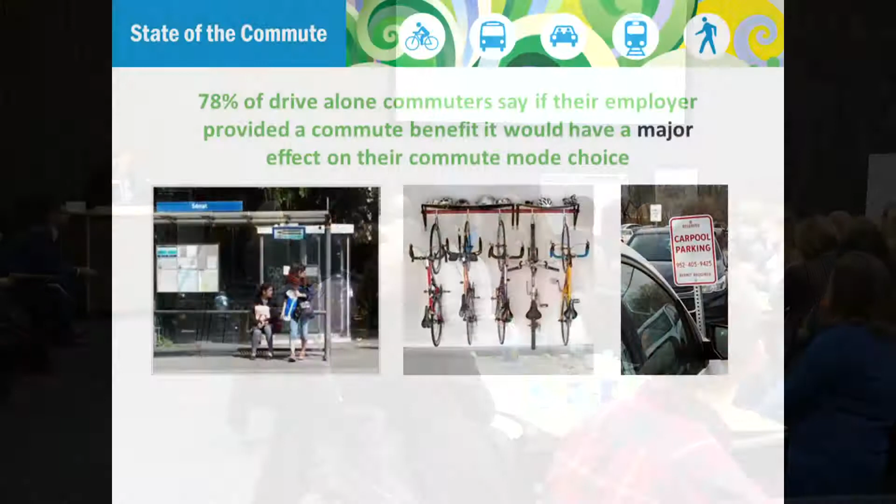When employers provide commuter programs such as transit benefit, telework, van pools, preferential parking programs, 1 in 5 employees kick their solo commuting habit. And that's really a 20% shift. So that's a big change, and that really makes a difference. And that happens a lot on 494.

When is it the most effective time to change someone's commute? Really, when there's another change happening. So when they're starting a new job, when they move to a new location, or when something disrupts their daily routine. And that happens a lot in this corridor. And we're going to learn a little bit more about some of those disruptions to our daily routine and our commute from the MnDOT folks. But it's all positive. It's good things.

So I'd like to read a little introduction. We have three of our very great, helpful MnDOT employees here today. And Aaron Tagg, who's going to be presenting first, he's a professional engineer. He's worked for MnDOT for 17 years, and he started as a student worker when he was a civil engineering student at the University of Minnesota. He is currently a West Area Engineer in MnDOT's Metro District. As West Area Engineer, he helps to manage MnDOT's program in Hennepin County. Prior to serving as West Area Engineer, he worked in MnDOT's Metro District Transit section, working in right-of-way design and construction on North Star Commuter Rail, Green Line LRT, and Green Line Extension LRT.

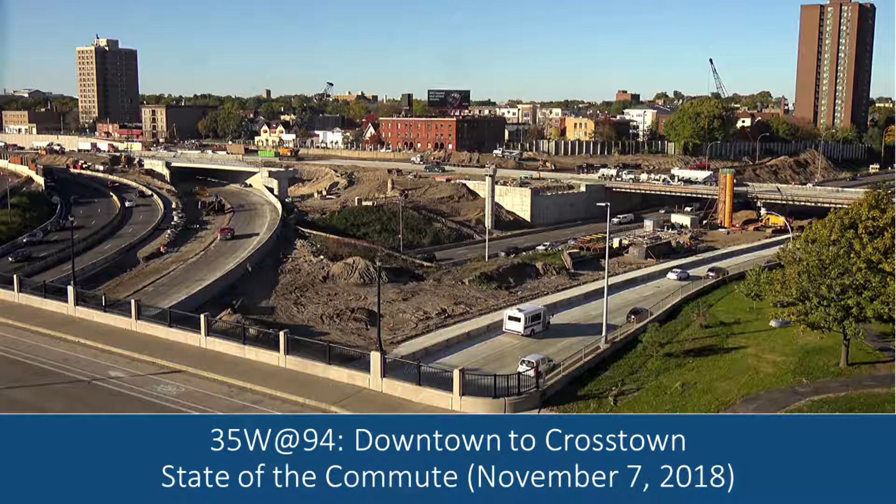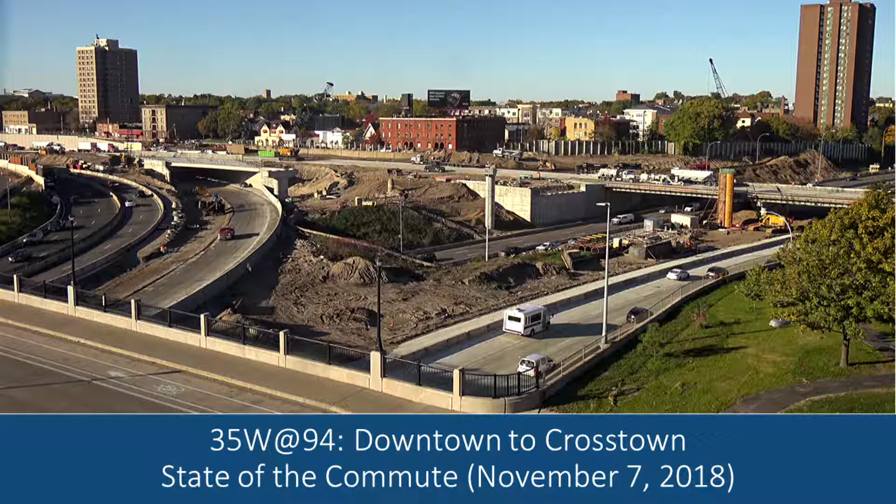But as background, the 35W 94 project is a big project we have going on right now. It started last summer, fall, and it goes through the summer of 2021. It's a project that came together after many decades of work. Four big partners are part of the project: Metro Transit, the City of Minneapolis, Hennepin County, and MnDOT. So I'm here today really to talk about where we are with the project and update people on the construction.

So on October 22nd, we had a big milestone. We moved into phase 3 of the project. Phase 2, which we were in this summer for about 4 months, was the most impactful part of the project. A big piece of that was we had the access into and out of downtown Minneapolis completely closed. So moving into stage 3 on October 22nd, we reopened that, as well as made some traffic shifts. You can see on this map we're about a third of the way through the entire project. So we're moving along, we're on schedule and on budget.

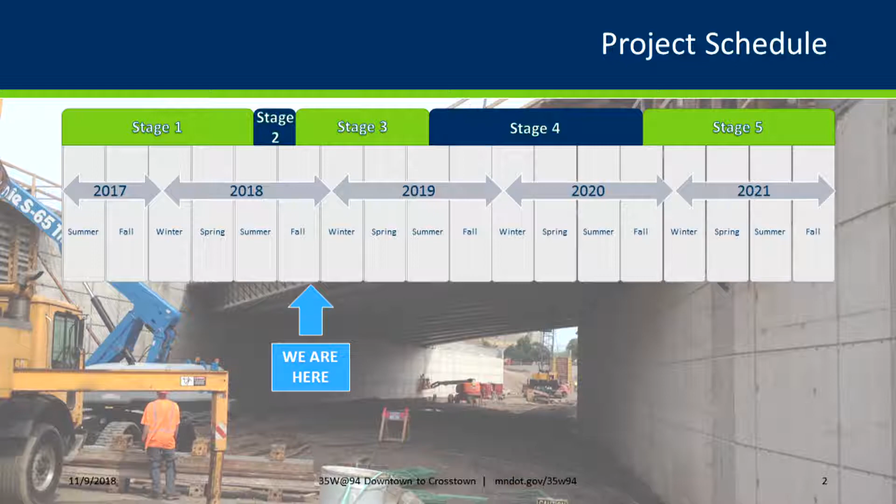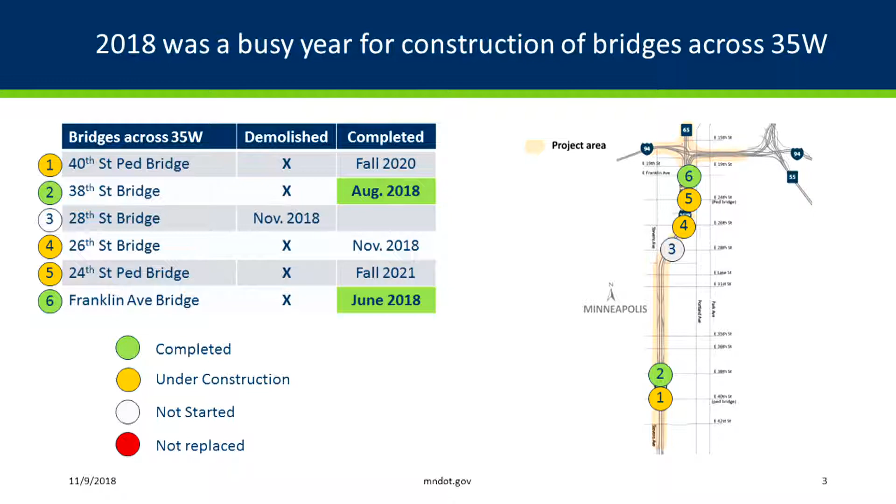So what we got done this year. It's a good time, moving into stage 3, to reflect on everything that was done. From a bridge standpoint, this year was really about getting bridges out of the way. There were a number of bridges that crossed 35W, and we got a number of them completed and a bunch out of the way. Tomorrow, I think at 5 or 6 a.m., the 26th Street Bridge that's been under construction for the last number of months will reopen, followed immediately by closing the 28th Street Bridge, which will coincide with a weekend closure this weekend so we can demolish that bridge. That 28th Street Bridge is the last bridge over 35W that has to be demoed as part of this project.

We also had a number of structural work around downtown Minneapolis. I'll talk about the tunnel bridge a number of times; you'll see it in the presentation to understand why we call it tunnel bridge. But we got a number of structures done in a very short amount of time this summer in the 35W 94 area.

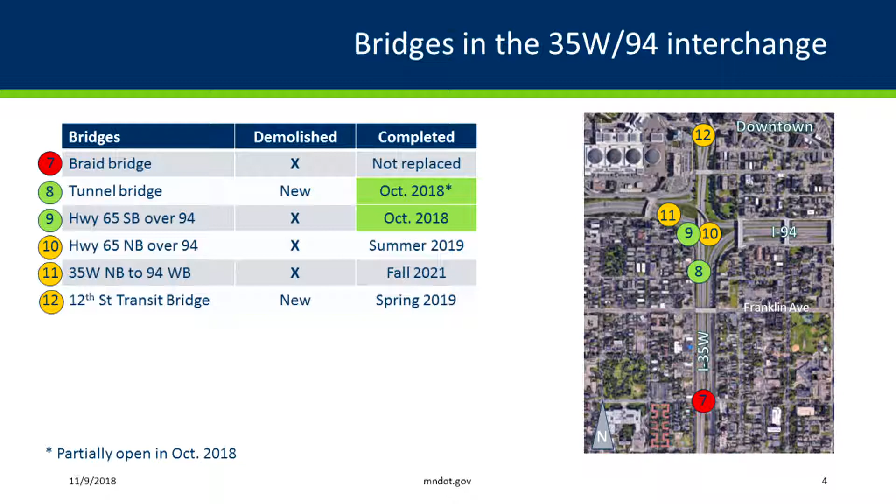And then we continue to work on bridges in the Lake Street area. Right now we're really working on the southbound side of the freeway. If you drive that corridor, you'll see probably close to a dozen cranes in this area. There's a lot of work going on here, and that work will continue through the winter. So we'll keep working on the structures and retaining walls throughout the winter to get a lot of those bridges done for moving into stage 4 next year.

Weekend closures. I noted we have one coming up this weekend, and tentatively another one next weekend. We've had a lot of closures this year. A lot of that was related to bridge demolition and getting those bridges out of the way, as well as some pretty major utility crossings that we dug across the interstate over a weekend, put in some very large utilities, repaved and got them back open. But as you can see from this chart, the majority of the weekend closures are behind us now. Moving forward, we're going to see a lot fewer, maybe one or so a year.

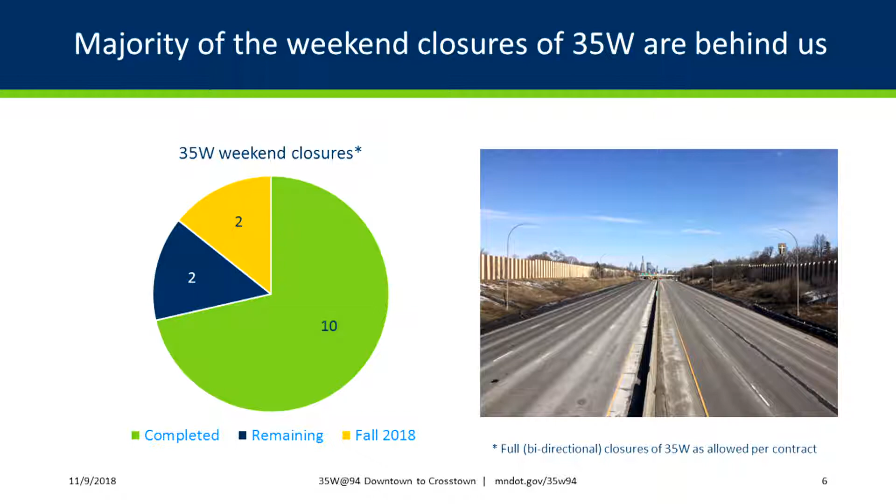So what did we get when we moved into Stage 3? First off, we opened access out of downtown Minneapolis on what we call Highway 65. That is transit only, so it gave them a big advantage. Charles will talk about this maybe later, but Metro Transit and MVTA have seen a big savings in being able to move back to that entrance out of downtown Minneapolis. We also opened one lane into downtown Minneapolis for general purpose traffic. So anyone can now get from 35W directly into downtown Minneapolis via that direct connection.

We closed the 31st Street entrance ramp. Previously that had been open to buses and violators. Now it is closed to everyone. The buses can't use it, and if violators try now, they'll end up in a big pile of dirt. So that's closed now. I really encourage anyone driving downtown to follow the signs we have. We have two big do not enter signs on either side of the ramp.

That means please don't go that way unless you are a bus and it says you can do that. There's a number of reasons for that. Some of it's safety, some of it's how the traffic interacts when it merges onto the freeway. Professional bus drivers coming, 1 minute or so, can merge into traffic a lot easier and safer than general traffic can.

We moved the alignment of southbound 35W to what is essentially going to be the permanent alignment. So we did a lot of permanent paving in the October timeframe, and you'll see that a little bit later. And we opened the northbound 35W ramp to 31st Street Monday. So that was good news for people trying to get into South Minneapolis.

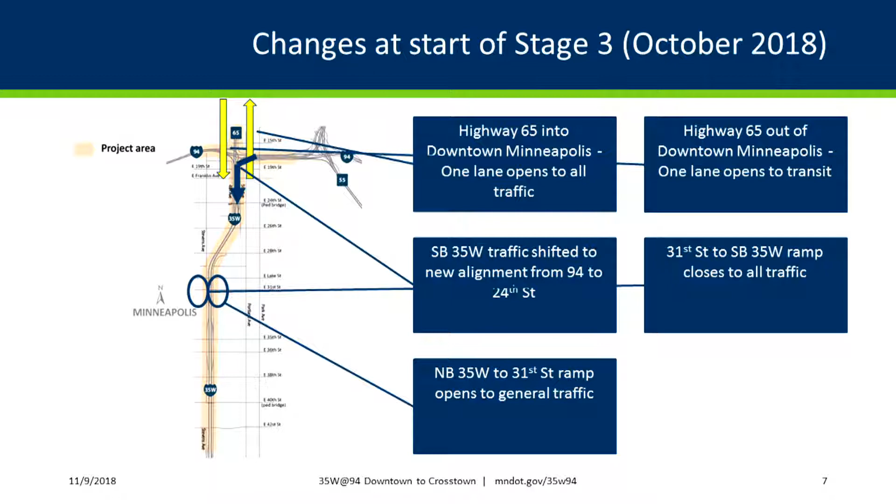And so what are we going to work on during Stage 3? Continue to work on some of the bridges near downtown Minneapolis. Continue to work on that southbound side of the freeway, kind of between where the new pavement ends today down to the 31st Street area. Keep working on bridges, get a number of those done.

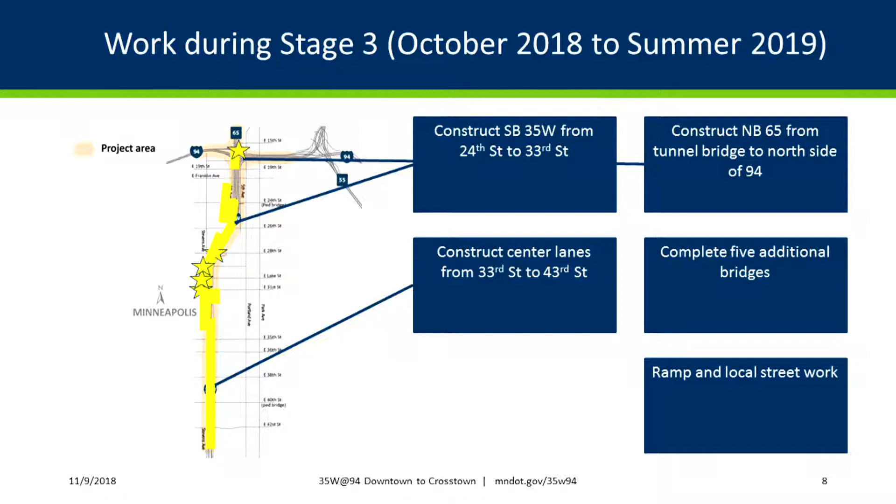In the south part of the project, right now we're really working on the center of the freeway, so we'll get the permanent pavement and median barrier in for the center of the freeway. And then there will continue to be a lot of work kind of on the outside of the freeway area, on the side streets and intersections, retaining walls, utilities.

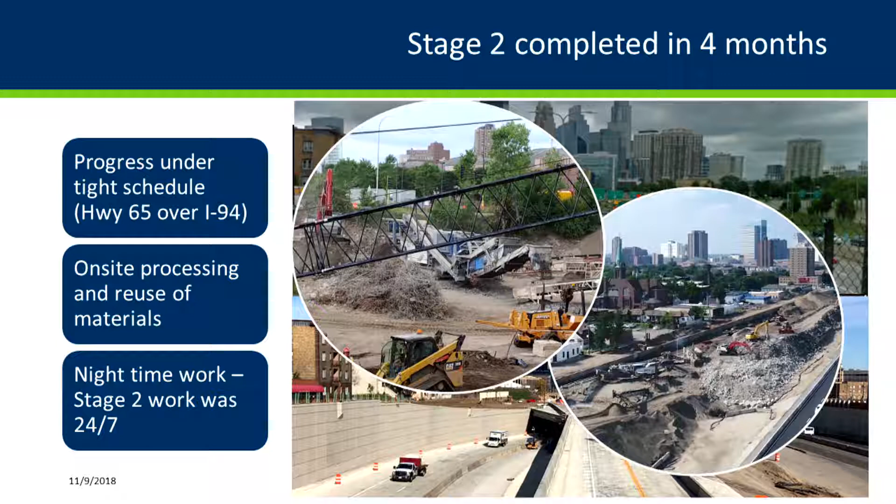As you've traveled the corridor, you've probably seen the huge piles of concrete that turned into huge piles of crushed up material. Not only is it great that we're able to recycle all this material, but we're reusing this material as base for the highway, so it saves a lot of trucking. So there's thousands of trucks that we're taking off of the regional freeway system, off of local roads, by being able to crush this concrete on site and then reuse it right on site. Otherwise, we would have to haul all that off and then haul in new material to place for the pavement.

They're paving the southbound 35W lanes over here, a big job, and they're paving the new deck for the southbound Highway 65 bridge into downtown Minneapolis. So just about every night, they moved it around. They were trying to kind of spread the impacts. This is something that really helped with traffic and transit to get those services into downtown Minneapolis reestablished, but it did have an effect on the neighbors who live around here, and we're trying to minimize that by moving crews around and stuff like that.

All right, so now we have some drone footage of what it looks like today. So this is looking south, so downtown is right behind us, 94 is right here. This is all new pavement that was completed during stage 2 of the work. New bridge over 94, the new Highway 65 bridge up here. This is what we refer to as the tunnel bridge.

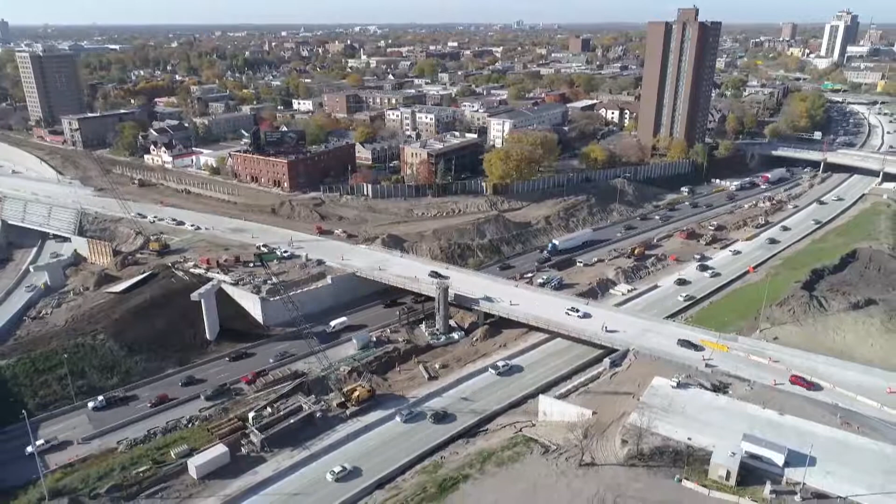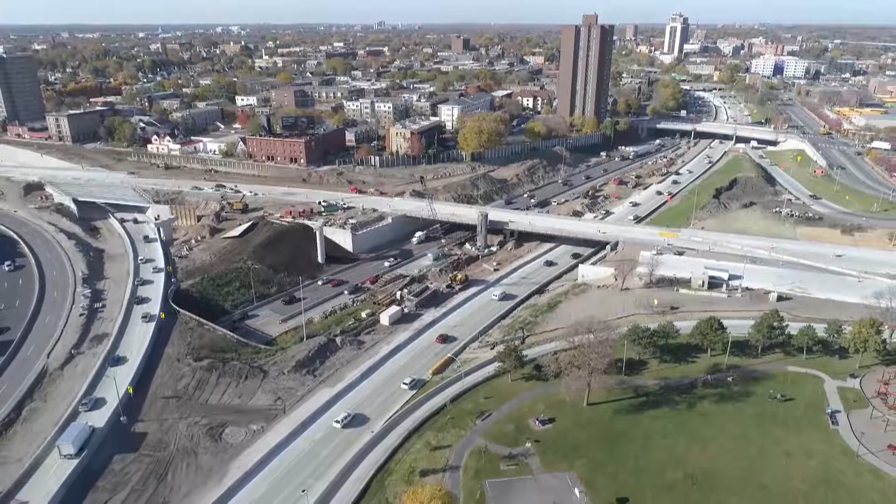So this is a new configuration where southbound 35W comes under Highway 65 through the big curve. Before, southbound 35 kind of was on the left side of the corridor, and then around 24th Street we had the Braid Bridge, so it came up and over and came in actually on the right side of the freeway. So this changes that configuration. You can see the piers here starting to appear for the new northbound 35 to westbound 94 bridge.

This is looking kind of northwest, so 94 is over here. Here's southbound 35. Again, you can see the tunnel bridge here. This is the reestablished 65 into downtown Minneapolis. It's just one lane for general traffic right now, and then one transit-only lane out here.

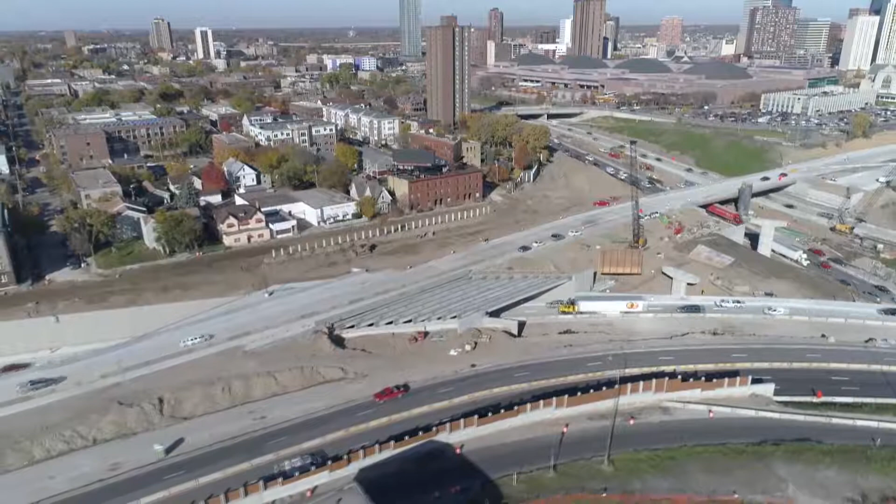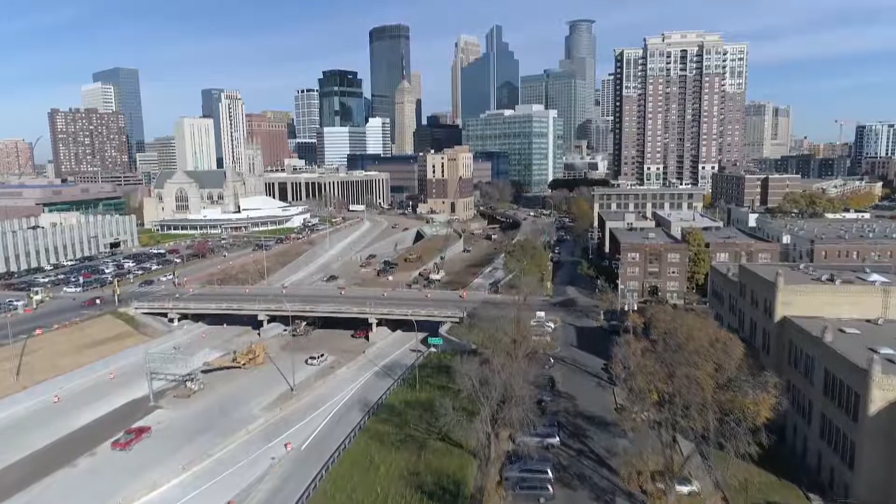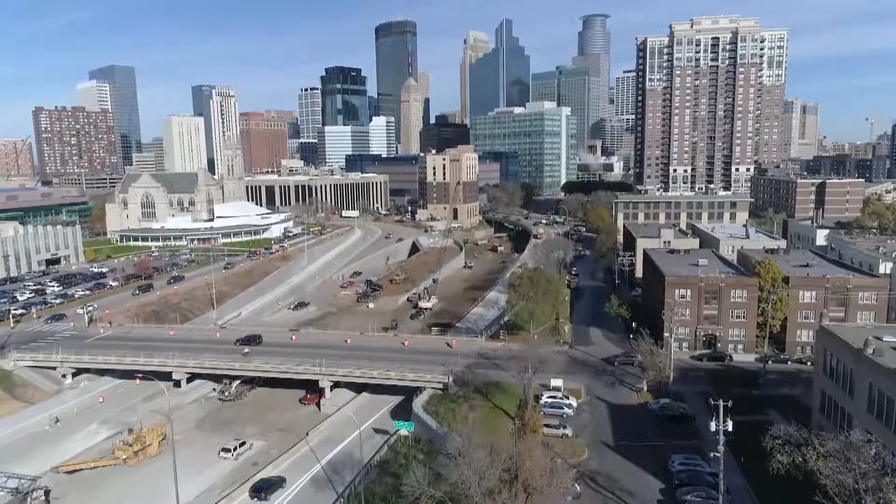Down here, this is where southbound 35W had been during stage 2 of the project. And then this is kind of flying on Highway 65 into downtown Minneapolis at the 15th Street Bridge. Looking here, this is going to be the new transit access into and out of downtown Minneapolis on 12th Street. So we've reestablished people being able to get into here.

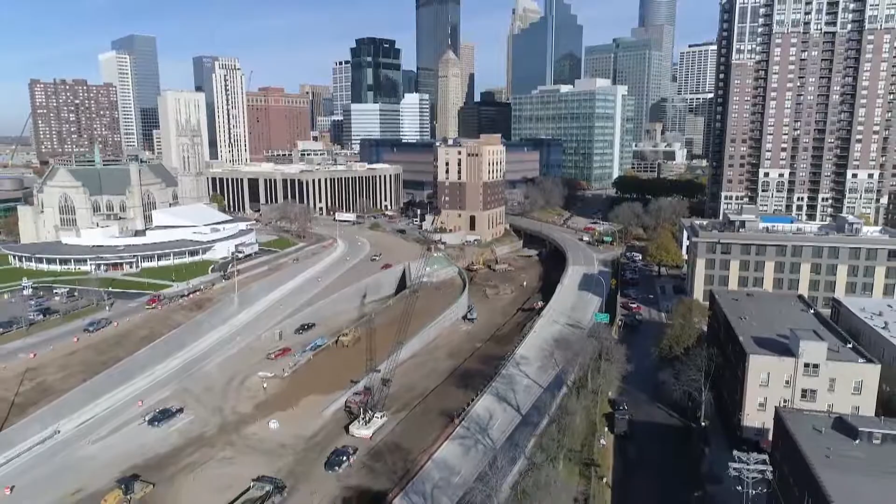They paved Fifth Avenue since this was done, so they're working on trying to maybe get that open this fall. Still, it's not supposed to open until next year, but they're working on that. And then this is the off-ramp of 12th Street for the buses only.

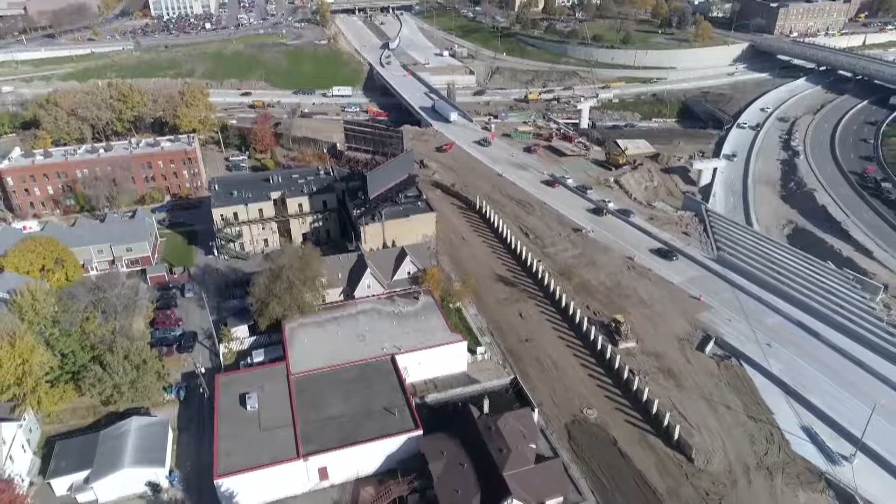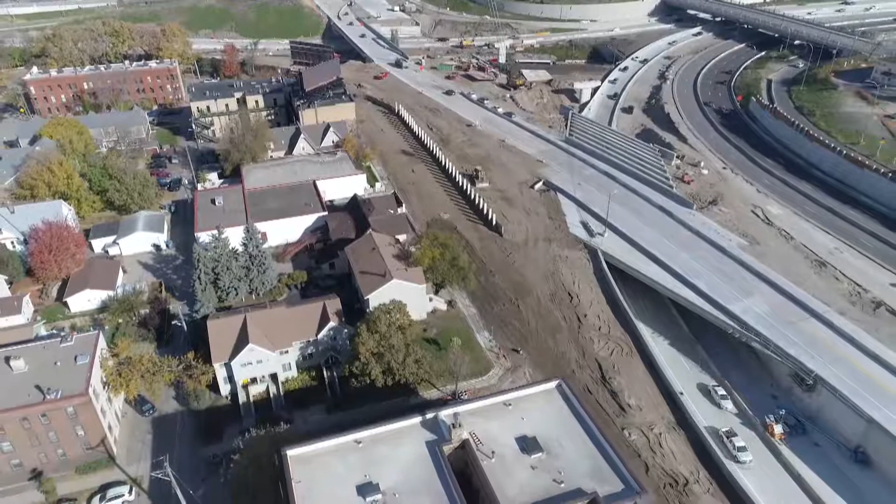And then another view looking north, so there's 94, 35 going around the side over here, and that's Highway 65. You can see the disruption to a lot of the residences along here. The street was in front of their residences, and it was torn up for much of stage 2, but that's getting back in place and will be paved before the winter.

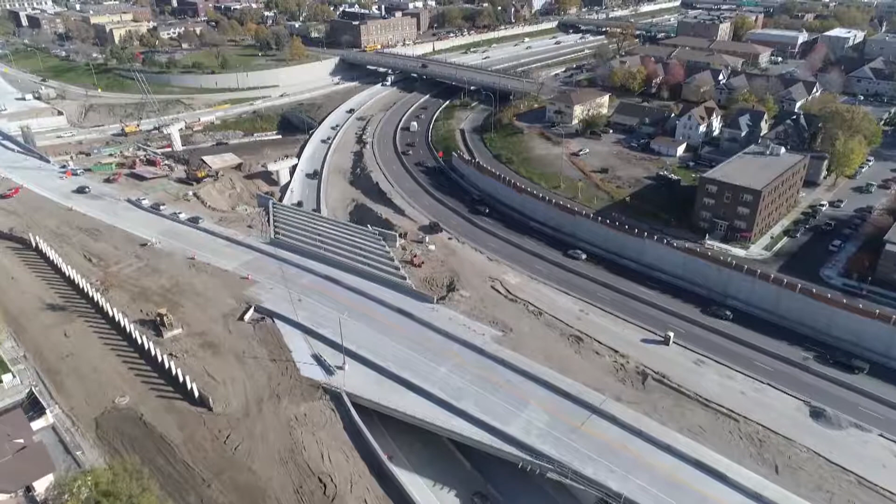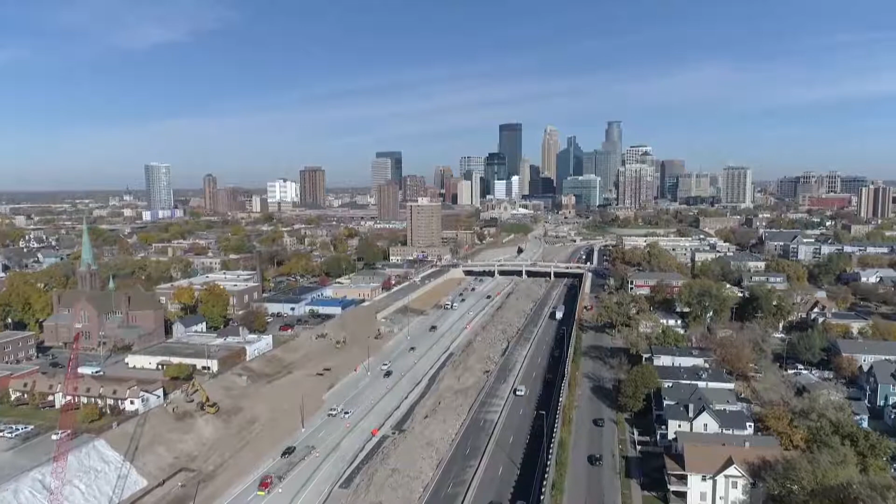This is from about 24th Street looking north. You can see the retaining walls starting to come in on the west side of the freeway. You can see where they've been completed over here. The new Franklin Avenue Bridge opened in the June time frame. This is all new pavement in this area, and the northbound traffic is over on the right side of the freeway headed northbound.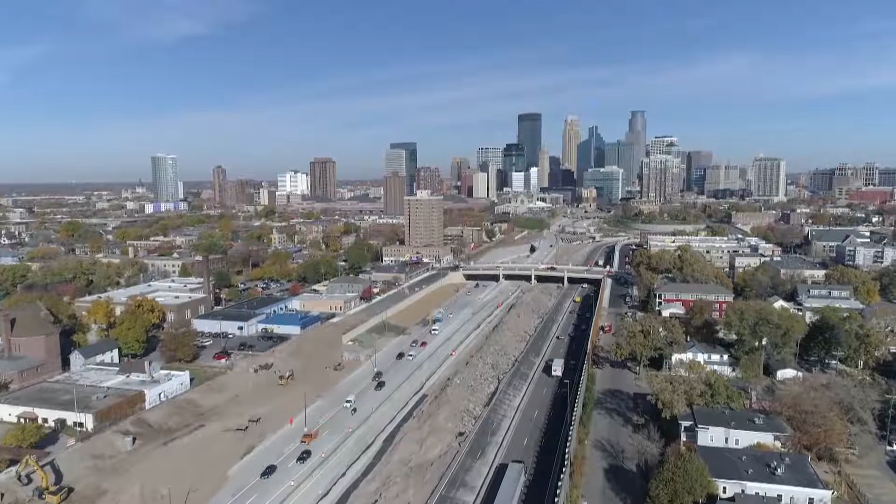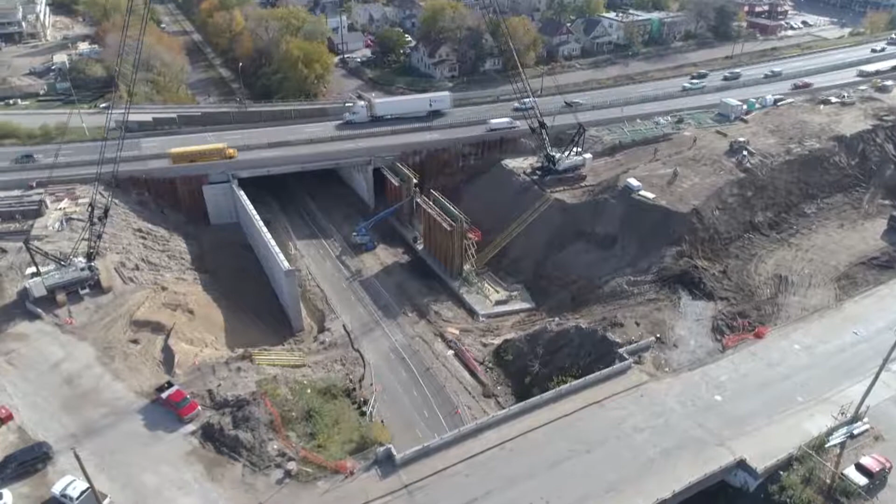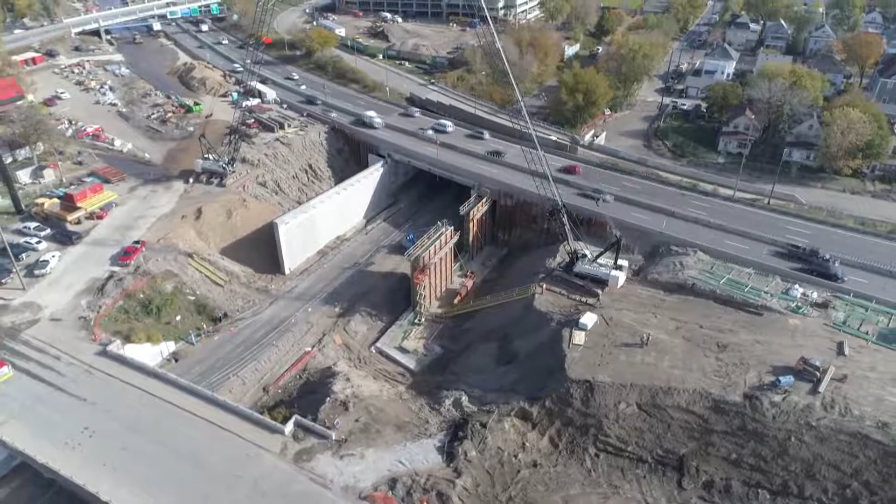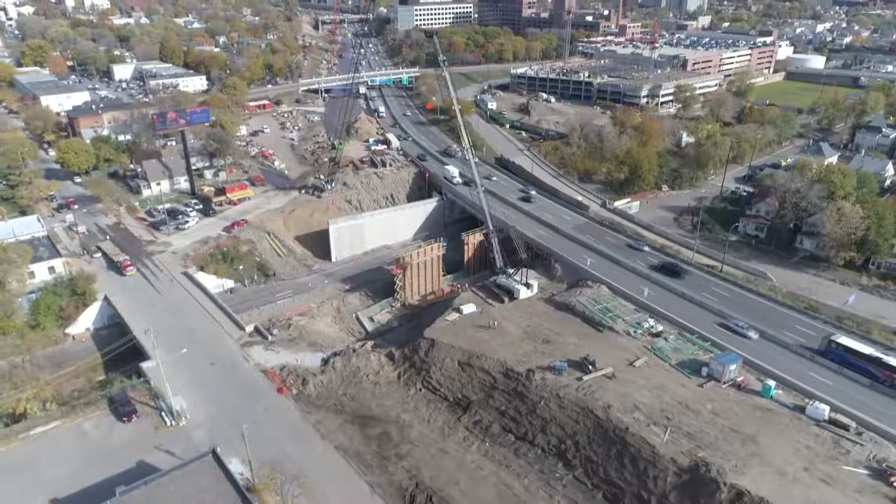This is the Lake Street area. So they've started work on the southbound bridges around Lake Street. And one thing I want to point out here, and I don't want to steal Charles's thunder for later talking about the Orange Line, but I just want to note that you can see how little space there is underneath 35W with the existing Lake Street bridges. With the new bridge and the new transit station, these are the two abutments, so there's that much room underneath 35W. So from a perception standpoint, as you are a pedestrian or transit user going through that area, it will feel much, much better.

And then this is the south side of the corridor. As I said before, we're largely working in the center of the freeway. They will pave that next year. And then as we move into stage 4 of the project, the southbound traffic will move into the center lanes, and they will start reconstructing the southbound side of the freeway. Right there is the pier for the 40th Street pedestrian bridge.

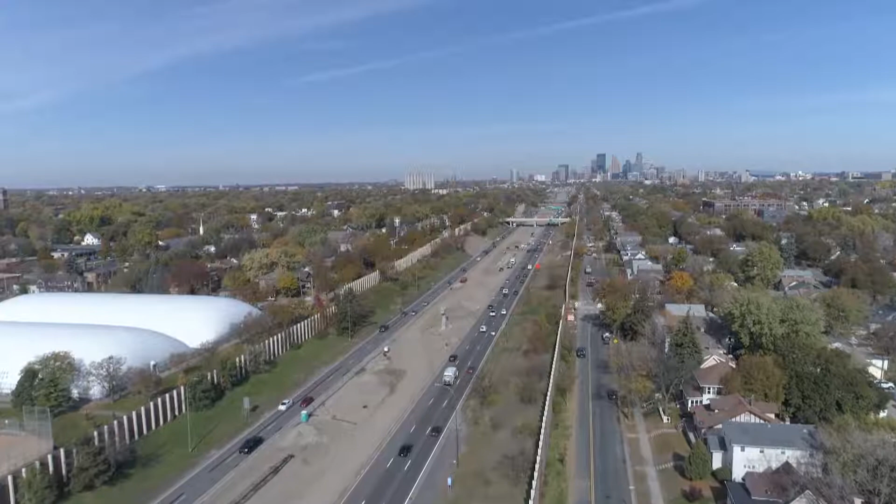So that is kind of a quick update on the project. I think we'll do questions at the end after we all get through our different projects, but I think Andrew is next to talk about the river bridge.

Again, my name is Andrew Butaya, and I'll talk about the 35W River Bridge crossing. I don't have an aerial video, it was all used up. I was just hoping that you have left the construction in Minneapolis in your rearview mirror. We get you when you're just about crossing Bloomington.

So I have a couple of slides that show where the bridge replacement is happening. I'll talk briefly about what we're trying to achieve with this project. And then the last points I'll talk through is what the construction staging is looking like. So this is, as you're crossing the Minnesota River, Bloomington is on the north side, Burnsville is on the south side. Our construction limits are from the 106th Street Bridge, which is about there, up to Cliff Road.

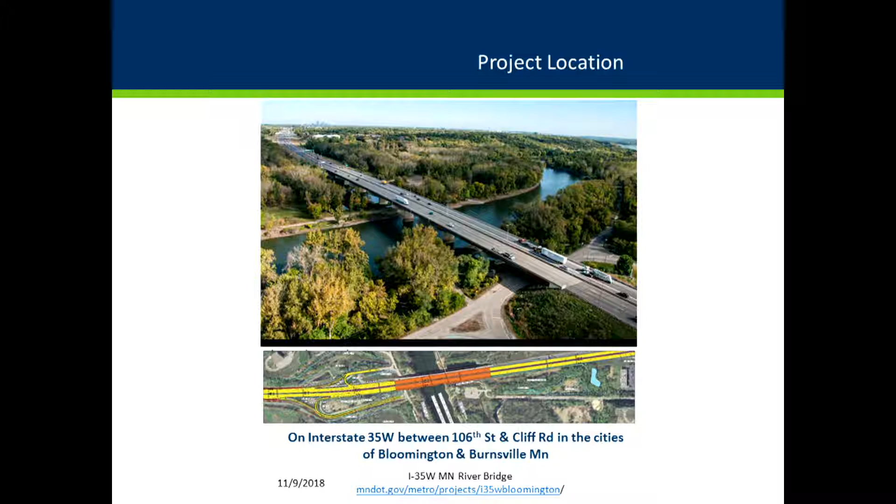We are replacing the bridges where they have reached their useful life, and as part of the project, we are reconstructing 35W, raising it up from the floodplain, if I could say, about 3 feet, and including a trail. There is an existing trail down by the river, so we are going to be introducing a new trail that crosses the bridge and connects back to Angel Avenue in Bloomington.

It is important to also point out that the project was a partnership with both counties of Hennepin and Dakota, plus also the cities of Bloomington and Burnsville, and Metro Transit, as they were planning their Orange Line BRT that is running from Burnsville all the way to Minneapolis. And of course, the Federal Highway Administration, because they had to sign off on an environmental document to allow the project to move forward.

So what we were trying to achieve for this project was that, again, the bridge had reached its useful life, so it needed to be replaced. But as part of that effort, we wanted to also improve vehicular safety and mobility across the river, and improve pedestrian access. So that's the trail that we're proposing.

The project is a design-build type of delivery method, meaning that we got a contractor on board, Ames Construction, which is actually the same company that is doing Lake Street, 35W and 94. So once they got the project, then they start on the final plan design process.

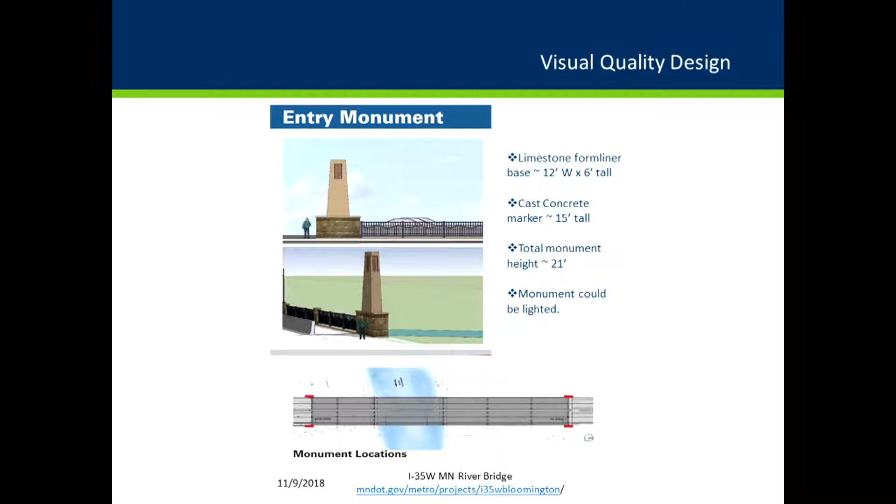So for construction staging, I would encourage you to visit the project website, because remember, it's design-build, everything is not set in stone until the contractor has designed it. So some of this might change, but as of today, we are envisioning that the project is going to start in the summer of this year. It's going to be going through the fall of 2021. There will be off-peak lane closures throughout construction, except during the winter months, when all lanes will be open.

The big shift is that southbound 35W from 106th Street is going to be reduced from 4 lanes to 3, 2 general purpose lanes, and 1 MnPASS or HOV lane, high occupancy vehicle lane. The trail at the bottom, unfortunately, will be closed during the day because they're working down at the bottom to do repairs. And throughout construction, there might be more than 2 or 3 lanes closed. So the highway may be reduced to single lanes in each direction after 10 p.m. But again, that would only be happening outside the winter months.

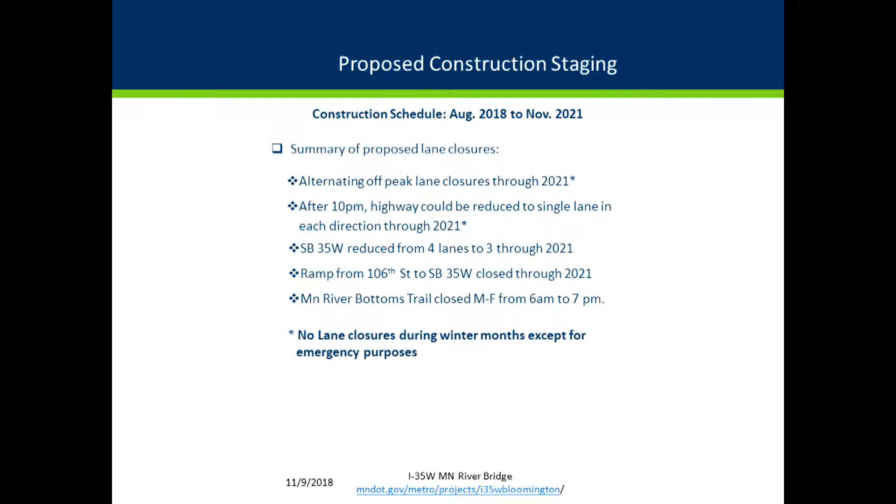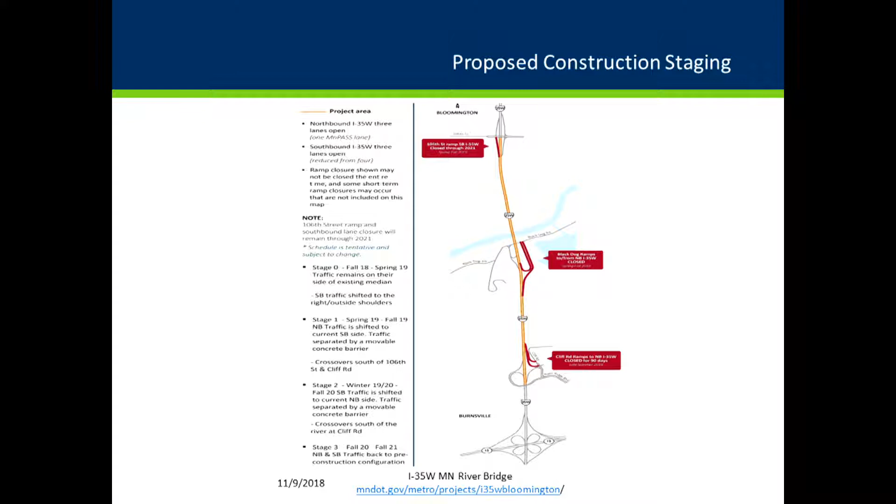So if you care to know what side of the existing median barrier you will be traveling on, this is the slide that highlights how they are planning to replace the bridge. So currently they're working on the northbound bridge. There are 2 bridges abutting each other, so they're working to replace the northbound side. Traffic is going to be shifted to the west side of the existing median barrier throughout 2019. In each direction, we shall be placing movable barriers, of course, to demarcate where the lanes are.

In 2020, traffic will be shifted back to the right side. If you're going northbound, to the east side of 35W. And lastly, in 2021, traffic will go back on their respective sides of the existing median barrier. So questions, again, will be following after this presentation.

I'm here to talk about the 494 pavement project. We are kind of coining this Between the Rivers, so it doesn't get confused with one of the next projects that's coming up. This project is on 494 from the east side of the Minnesota River Bridge to 3rd Street in South St. Paul. So it goes through Eagan, Mendota Heights, South St. Paul, Sunfish Lake, and Inver Grove Heights.

The work description includes pavement work, so a mill and overlay. It includes 7 bridges that are getting a surface treatment and new expansion joints. There is sidewalk work at a number of intersections outside of 494, new signals on both sides of Pilot Knob Road. And then there is lighting work in the median of 494 that will be replaced. We understand that this project is going to be impactful to both the commuters that travel this route as well as residents, because we assume traffic will divert off 494 and try to find alternate routes.

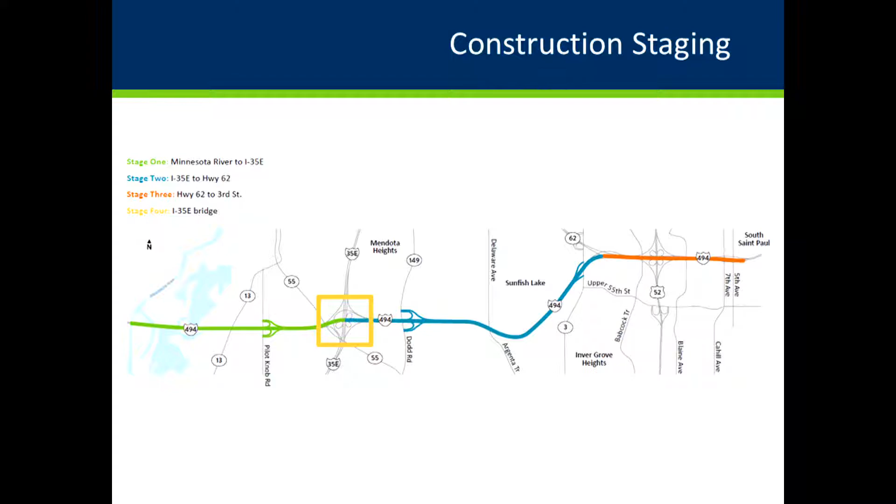We modeled a number of options for getting in and getting out quicker in this area. So what if we did a full closure for a week? Could we get all this work done? Could we get in and get out? And it just kind of diverted all of the traffic on 494 to different routes. So 52, 35E, you name it, it saw a ton more traffic, and those routes couldn't handle all of that traffic for that week. So we are planning, again, those weekend closures. We anticipate 12 of them.

We are requiring the contractor to work westbound 494 in 2019, and we will allow some of the work eastbound to carry over into 2020. And this is only because the industry that we met with said there is not really a chance you can get all of this work done in 2019. So we will push to get as much of it done in 2019 as possible, but some of it, especially the bridges, we know will hold over until 2020, but some of that pavement work might hold over until 2020 as well.

So public outreach, we are planning to do more technology-based outreach than a standard open house. We will not plan to have really any open houses for this project. There might be specific ones for neighborhoods that might be impacted, but for the general public, we are really going to use Facebook, Twitter, and Instagram using targeted ads. For those, we will use our typical MnDOT outreach, so a news release, website updates, email blast if you're subscribed to the project update.

We're reaching out to the cities in the area and the county as well. We're happy to provide a blurb, we call it, so information about the project that the city could share with their standard newsletter that they print and mail to every resident and business in the area. We are happy to reach out to anyone. We're planning local, regional TV, print, and newspaper or radio as well. We're happy to tape a segment on local access. We want the word to get out. So if you have any ideas for us that we could try, we're happy to do so with this project.

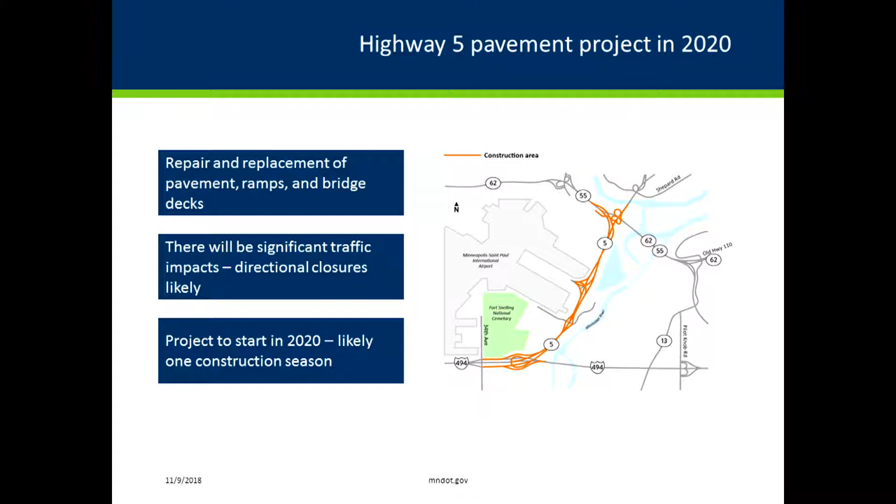Because of the type of work we need to do here, there will be some significant traffic impacts. We're still working on the details of that. But it's likely that we're going to have directional closures along this segment of Highway 5. So more to come on this next year, but just wanted to get this on everyone's radar. And let us know if there's any coordination with your cities or entities that you'd like to have in the near term.

Andrew has... I have one more. Okay. If you want to listen to it. We want to listen.

All right, so I have a couple of slides on the 494 corridor between the river by the airport to 169. So this is a planned project that is anticipated to begin construction in 2023. But we would love to, of course, involve the public on helping us identify the priorities that we should be trying to address. So in my presentation, I'll talk through the goals that we want to achieve, budgets, the delivery schedule that we are currently tracking, public engagement strategies, very key to getting the word out there and promoting public support and input in our project. The phases, I'll talk through just 2 phases of the preliminary design process that we are currently underway on.

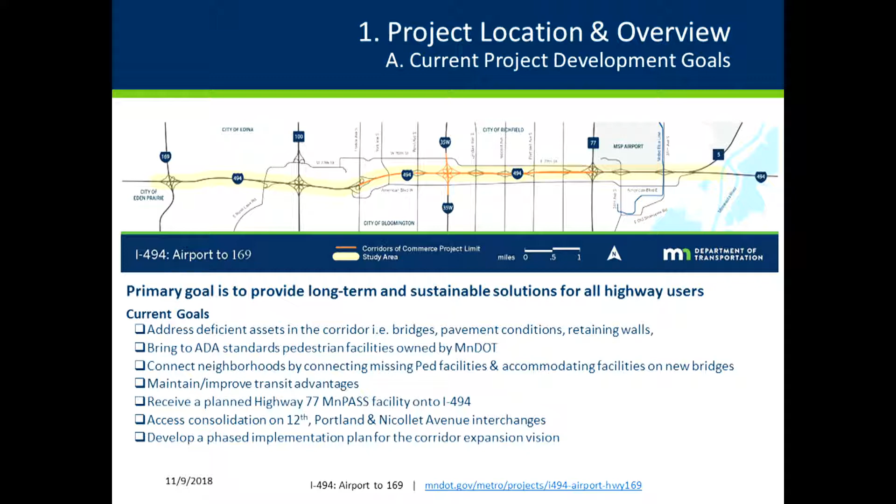We are very interested in improving transit advantage by providing the added capacity on 494. Dakota County has plans to introduce a managed lane or a MnPASS lane on 77. That is projected to come after the work on 494 is done. So we would want to accommodate that additional capacity when it comes in the future.

It is a very big price tag to get this entire vision realized. So part of the deliverables of the project that I'm leading right now would be to create a report that lays out how we are going to implement the entire vision of the expansion.

So thanks to our local partners, including the 494 Coalition, the cities of Bloomington and Richfield, Hennepin County, Metro Transit, and of course the state legislature, they awarded the corridor bonding money to add a managed lane facility between France Avenue to Highway 77, but also to reconstruct at least a phase of the interchange at 35W and 494. So the 70 million is to build a northbound ramp from 35W to westbound 494.

As part of our planning, we have identified currently just a portion of pavement asset need that we'll need to do, and that is from the river to 24th, which is about there. No, it's actually here. 24th is to plan for a concrete pavement rehabilitation job. As always, when we are planning such corridor projects, we want to come in, get all the asset repairs done, and try to stay out for at least the next 20, 30 years. But of course, we have constraints; we don't have that deep pockets. So, with that vision of staying out, now we are looking at how we could fund the additional pavement needs from 24th to 100.

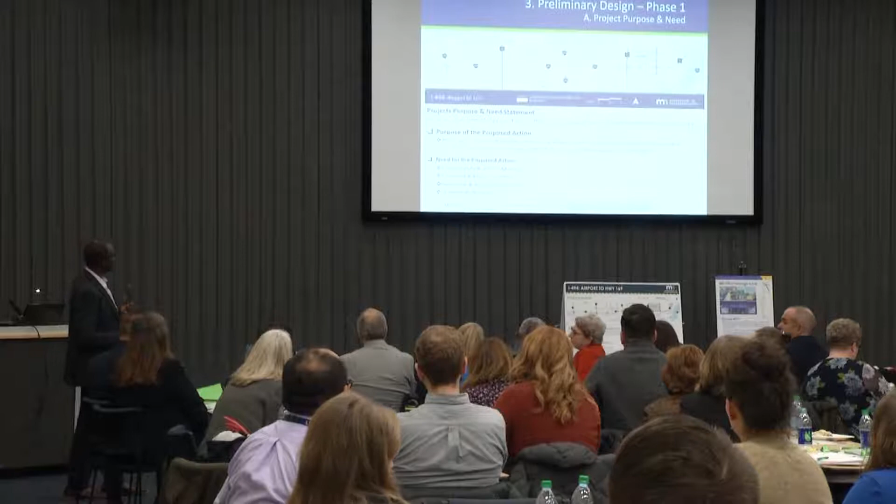I did mention asset needs that we have to repair to keep the corridor open, and benefits on increasing transit mobility along the corridor. So the purpose is to do that. The need is what we're going to be looking at. So how we improve vehicle safety is, of course, as you expand the corridor, you're giving them more room to traverse the corridor. That does help. Vehicle mobility, there could be an argument made between general purpose lanes and managed lanes on what improves vehicle mobility the best.

Asset conditions, I was hinting on that a lot because we have to figure out how we can be in and stay out for the next 20, 30 years. How we promote neighborhood connectivity by accommodating pedestrian access on all proposed new bridges, and how we deal with the overcapacity drainage system that is on the corridor right now.

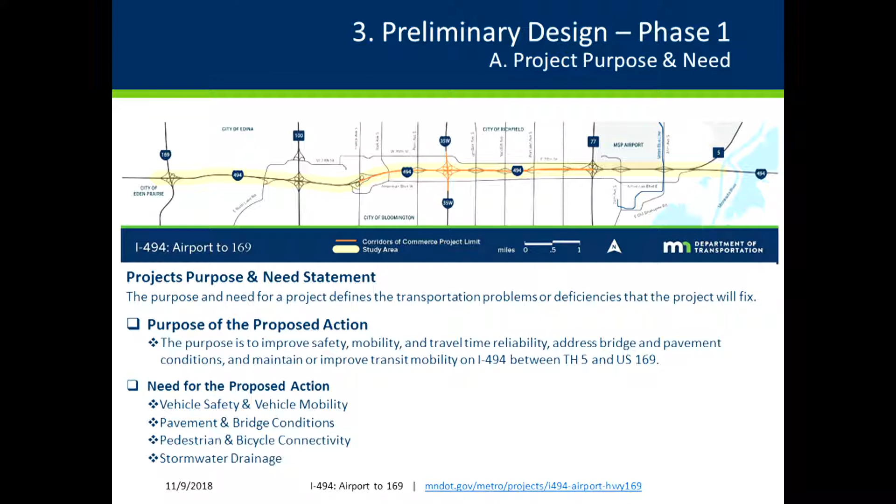So to get us to a well-defined purpose and need statement, we have held beyond 3,700 conversations with the general public, including pop-up events at farmers markets, council workshops, things of that nature. We sent out an online survey back at the end of September to get input on what the public thought about the corridor.

Luckily enough, it makes our job a lot easier because the public did agree that they're seeing travel time, so mobility is an issue on the corridor, which is in agreement with the data that we have. Very concerned about the number of crashes on the corridor and the asset condition. So we carried those forward as primary needs to fix on the corridor. And the storm water drainage, because if you don't see it, you don't worry about it, but it is still an issue. And pedestrian access was a very common comment that we received at the pop-up events.

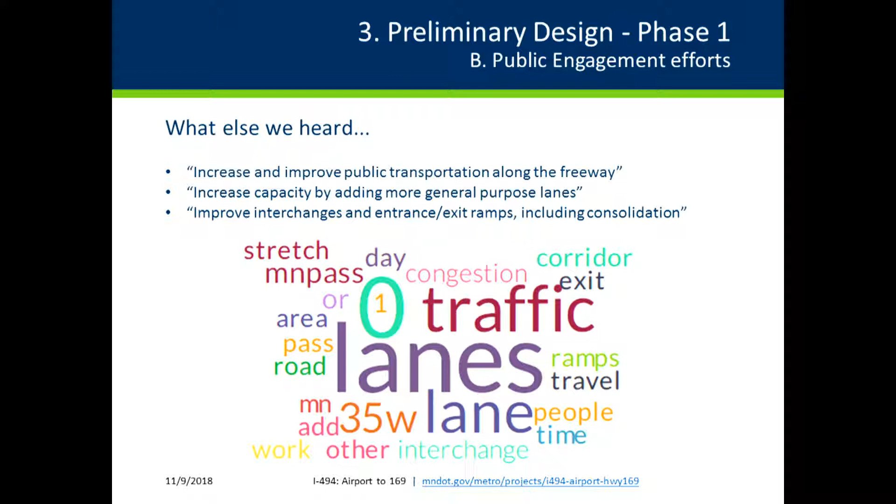On this online survey there was a comment section that people could also fill in, and there are about 205 additional comments that we got. The size of the text shows the popularity of the comment. More people are looking at getting additional lanes, how we manage congestion in terms of alleviating traffic backups on the corridor. What was very interesting is that the general public does understand that many entrance and exit ramps are causing some level of friction on mainline traffic. We received 53 comments talking about reducing the number of exit and entrance ramps on the corridor.

So we have submitted our purpose and need to the Federal Highway Administration for approval. We are now going into the phase of determining the alternatives that will be carried through final design, but also how we are planning to manage traffic during construction. I did talk to waiting until 2023 for mainline construction impacts. The next slide kind of speaks more directly to that.

I've mentioned early work packages that we could consider moving forward with. We did talk about 12th, Portland and Nicollet, so that's where we're considering access consolidation. We also know there are overpasses, so chances of us replacing them without impacting mainline traffic are high. Phase one of the interchange, because we have money for it, there is a chance that it could also go if refining our plans shows that we will not impact traffic.

Charles will be talking about the Metro Transit's Orange Line, Knox Avenue underpass. That's a project that is starting up next year. And wherever possible, utility relocations. In the past, we have had delays caused by utility relocations on projects. So any way we can manage any of that is to our benefit.

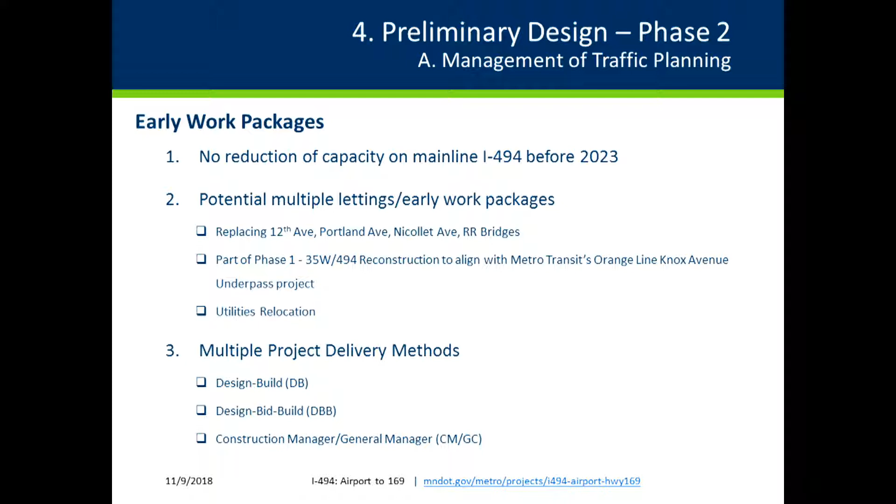So yes, this really speaks to the two seasons we have in Minnesota, winter and construction. Lake Street, 35W and 94 is up here. It's happening now. We have the river bridge happening through 2021. Marley did mention the 494 project. So as we look at the system, we put some level of thought and detail in how we stage our projects to minimize construction impacts to the general public.

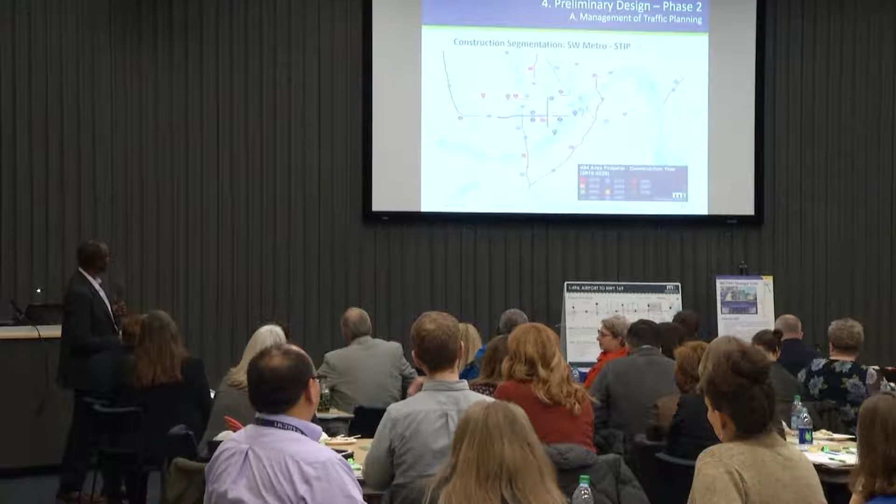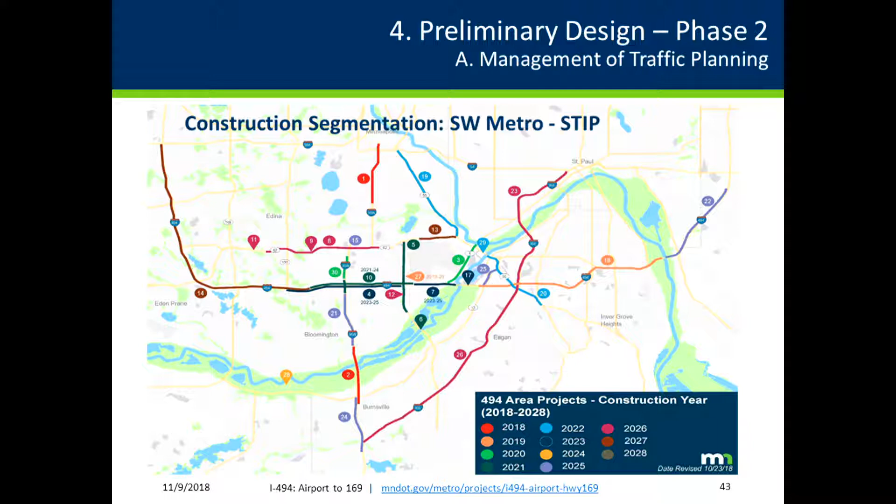So part of that is that we try not to be working on alternate routes. For example, when the 494 project comes through, we'll have Highway 62 as an alternate route for it. I did mention 35W, we have 169, we have 100 open. Aaron mentioned Highway 5, the Highway 5 job that is coming up in 2019 and 2020. So hopefully that is happening after the 494 project concludes. So there is quite a bit of effort that is put in as we lay out construction projects in the STIP. The STIP is a 5-year program that identifies all the projects that are going to be done by MnDOT in the next 5 years.

This is an FTA Small Starts project. Small Starts is a funding program that FTA provides. This is a $150 million project. About half of that would come from the FTA. The other half would come from local sources, primarily the counties and the state. It is a 17-mile corridor. We've identified 12 stations that are shown on the map along the way here.

What's different about Orange Line from our current bus service is that it runs all day and it runs both in and out of downtown. We've gotten very good over the years at bringing people into downtown in the morning and out of downtown in the evening. It's been more of a challenge to bring people through the corridor all day, to go to the reverse commute destinations, to get to locations such as along 494. A big reason why that's the case is because the infrastructure has not been in place to allow efficient, attractive transit in this corridor. So the Orange Line is about completing the vision that provides not just a quick ride into downtown, but a lifeline service that you can depend on across the day and across the years.

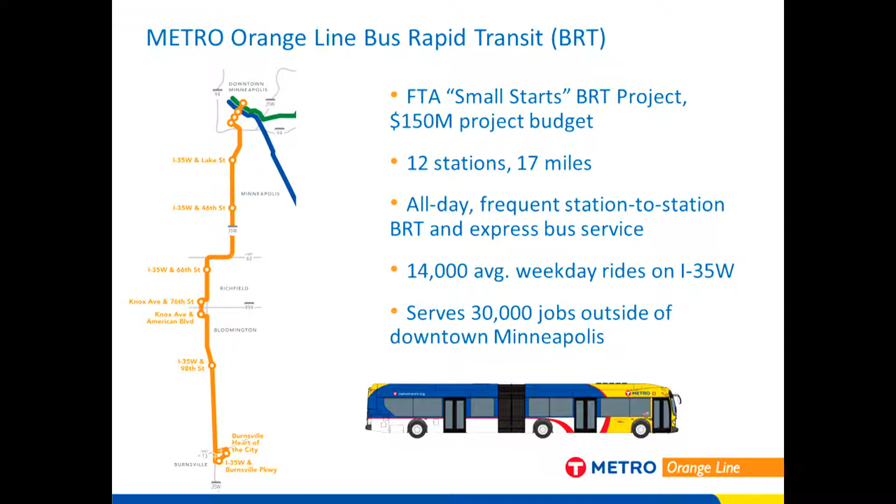And 35W is a big corridor for us. We carry 14,000 rides a day now. We're expecting to almost double that with the implementation of Orange Line, as well as ongoing development and growth within the corridor. We serve about 200,000 jobs with the Orange Line, about 30,000 of those directly within the station areas that we're planning outside of downtown Minneapolis, with connecting service to dozens of additional employment sites.

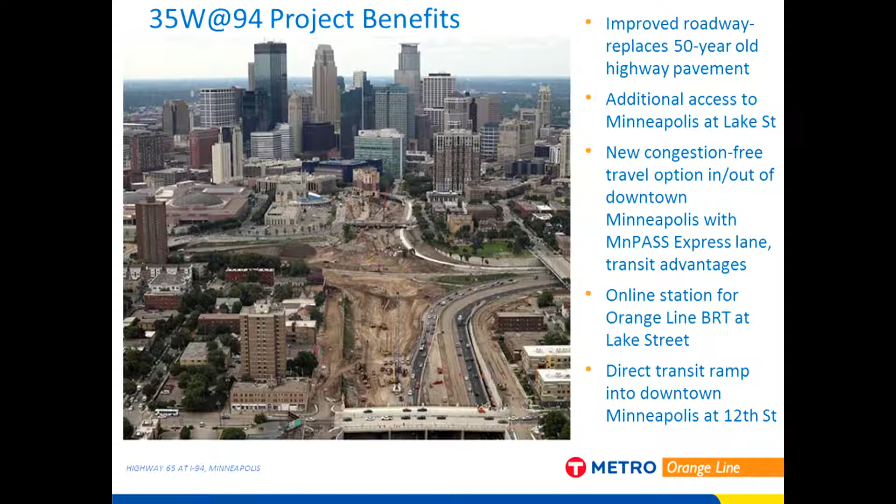So we talked about the 35W and 94 project. If you weren't sure whether downtown access was closed this summer, I think this picture kind of seals the deal on that. So this is about reinventing 35W for the next 50 years, and part of that is accommodating transit in a very purposeful, accessible and thoughtful way. It's new access to Lake Street. It is a new congestion-free travel option in and out of downtown through the entire corridor. Notably, an online station for the Orange Line project at Lake Street, a significant crossroads in the corridor, as well as a transit ramp into downtown.

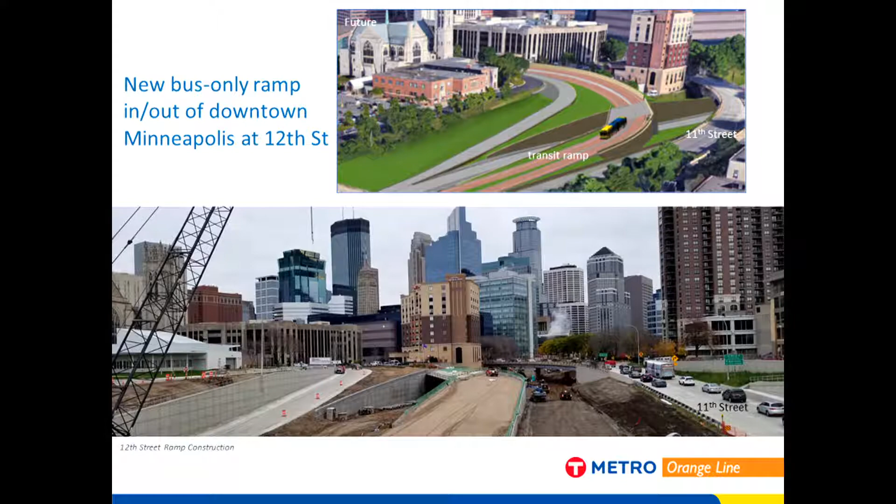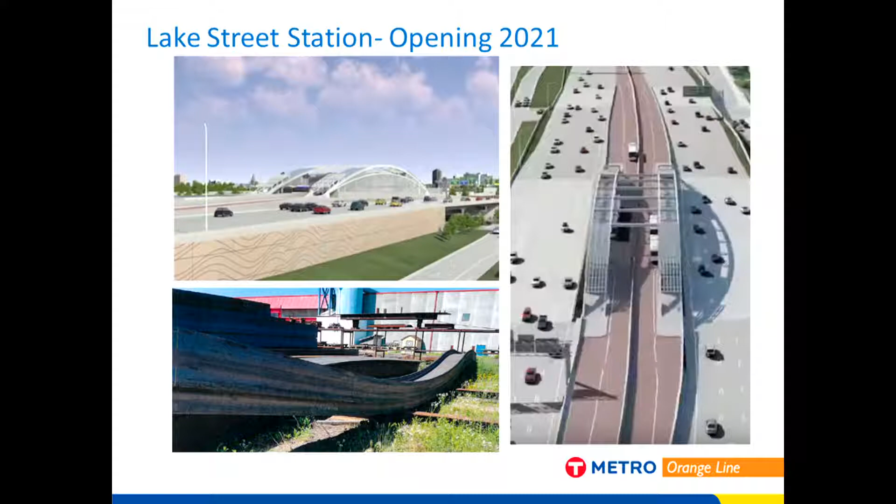But Lake Street and the work combined with the 35W at 94 project is not the whole story of the Orange Line. We have other stations along the route, and we also have other major infrastructure that allows us to provide all-day service and better access to 494. There's two other packages that we're getting ready to go under construction.

The first would be an underpass at Knox Avenue. We'll see a picture of that in a second here. So what this allows is a better access across 494 by going underneath it. There would also be stations that we'd be constructing south of 46th Street, as well as some changes within downtown Minneapolis. So that combined with the work shared with MnDOT would really complete the Orange Line package.

We are actually at the point of a federal decision. So we've requested $74 million from the federal government. They are considering our ask right now.

If there's any US DOT secretaries in the room, I'd like to talk with you after.

So that should be coming very soon. We're eagerly and anxiously awaiting that news from the federal government. With that in place, we would be ready to begin construction next year. So starting construction in 2019, once that full funding package is together, of course.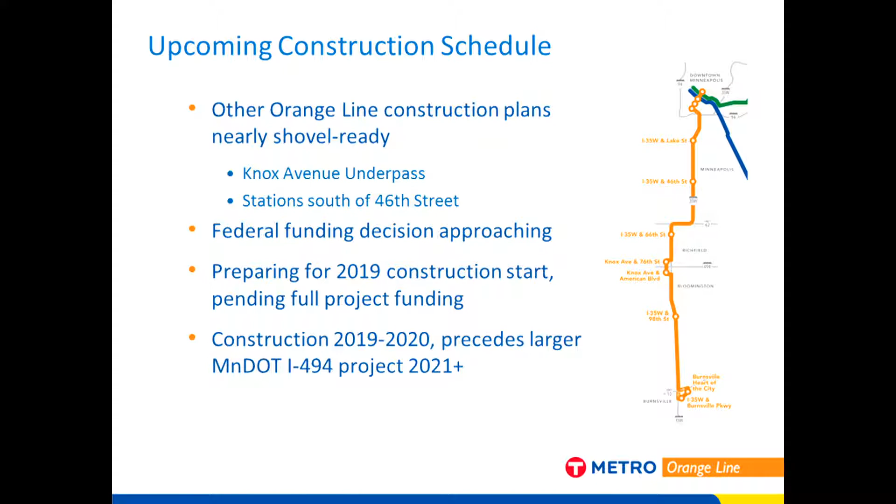Even if it's not right away in 2019, we would be continuing our work with MnDOT in the northern part of the corridor. With funding, we'd be building in 2019 and 2020, into 2021 a little bit, wrapping up our work ahead of the MnDOT construction project, which, as Andrew said, would be 2021, 2022, and beyond. So getting our work in and out ahead of that construction project.

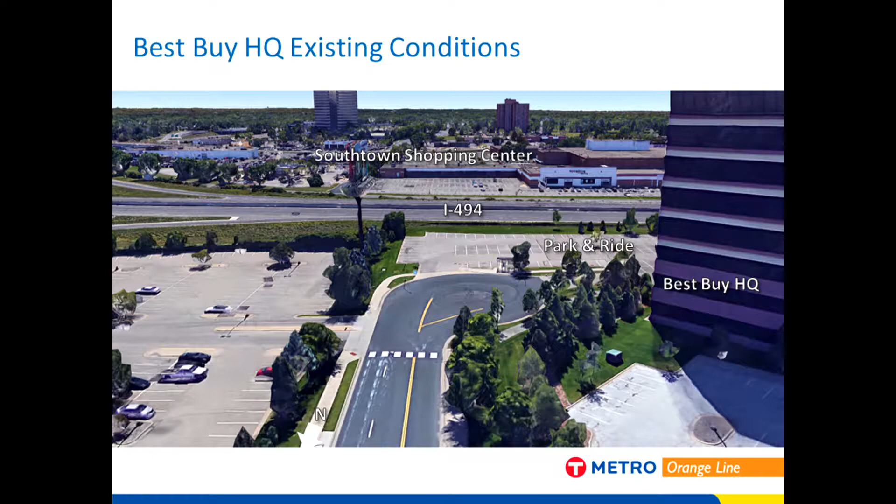So here's just a picture of what it looks like today as we look south onto 494 from the building that we're in here at Best Buy, shown on the corner there. So we have the park and ride located here in the Southtown Shopping Center just across the highway. This is what it would look like with the Knox Avenue underpass.

So rather than going through about a dozen lights and backtracking and a whole bunch of turns that we have to do now, which makes transit service to this area, even though we have it, not as attractive as it should be. It's not the choice. What helps make it the choice is having this piece of infrastructure in place. You can see the bus located in a transit-only roadway that would go underneath 494.

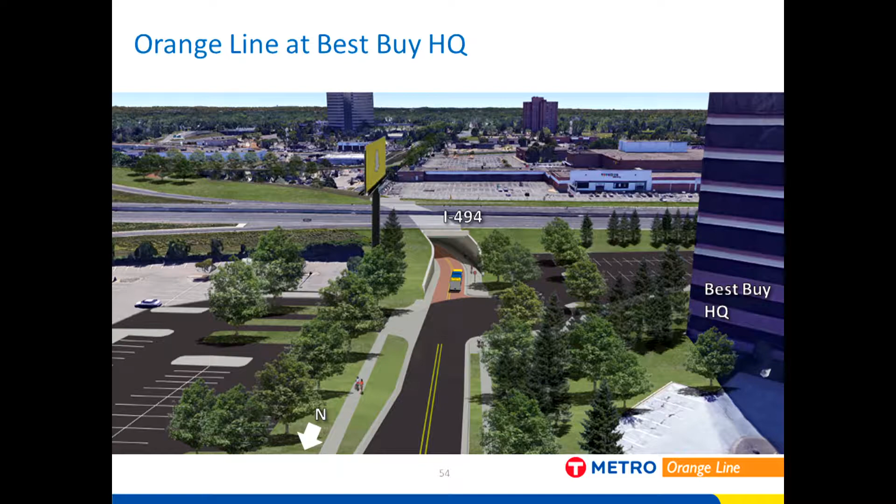In addition to transit, we would have bicycle access under 494, pedestrian access under 494, and hopefully not very many violators accessing underneath 494. We have our own police force in case that becomes an issue. So this would be a significant transformation for us. It would save us many, many minutes per transit trip.

It also would provide a better connection for all of the connecting service that runs on 76th Street and on American Boulevard, which would not have to weave its way over to one side of the freeway or the other. It can have a straight shot, as 35W service also has a straight shot. So with this in place, we're very excited to move the work forward and eagerly, again, awaiting a full funding announcement soon.

I'll also talk about another transformative project, the Metro Green Line Extension, also known as Southwest LRT. Has anyone heard of this project before? It's been out there for a while. So this project is set to open, we're planning to open it in 2023.

It's a 14.5-mile extension of our Green Line, highly successful light rail corridor, building 16 new stations and providing a single seat trip from Eden Prairie to downtown, the U of M and on to St. Paul on our light rail system. In addition to that, it would connect with the Metro Blue Line that would connect with the airport and the Mall of America,

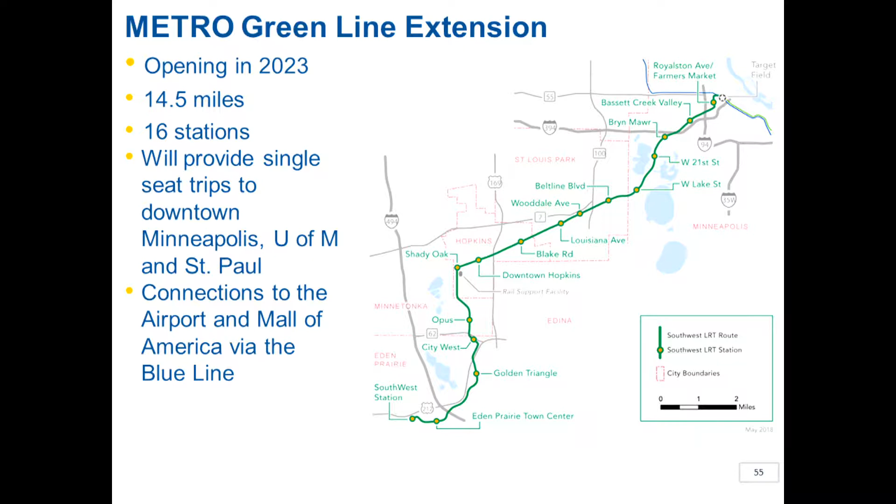really making a lot of trips possible that avoid all of those years and years of MnDOT construction projects beginning in the mid-2020s. So a significant part of new ways to get around. So the project, I'm happy to report, is ready to build. The funding is in place on the local level to construct this project, which is a $2 billion project. There is a whole series of federal reviews that you go through for this kind of project.

And the federal government has agreed with the overall project budget. They've agreed and given the project a very favorable rating within the competitive rating system that you go through to seek a $1 billion grant for projects like these.

There is also successfully negotiated agreements with freight rail corridors that this project intersects with. This has been a significant effort over a number of years, and those pieces are in place. And they have been approved by federal bodies that oversee freight rail and surface transportation. So that piece, long time coming and now fully in place.

The project has also received bids, so there's actually a bid in place for the bulk of civil construction on the project, and the Met Council is actually awaiting a federal permission to begin that work. So a lot of eager anticipation of that federal permission in the next week. It's called a letter of no prejudice. What it means is you can begin spending local money and have it count as part of the match toward the project for construction work.

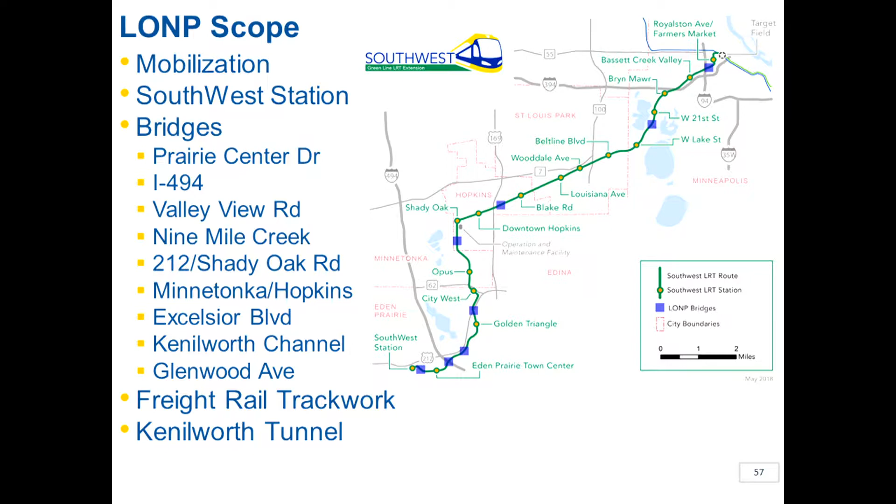So long lead time items, significant technical work, but important early work in getting the project moving forward, including a tunnel of the Kenilworth corridor further closer to downtown. So that is a quick overview of the transit projects, and would be happy to spend a couple minutes answering questions, if there are any. Any questions for Charles?

A lot of exciting projects coming. Well, thank you, Charles. Thank you. We appreciate your being here, and thanks for all your work.

And now we've got Kate Meredith, one of our staff members at the Commuter Services, is going to give us an update. Thank you, Brad. All right, we might need a little stretch. I'm not an engineer, if that's nice to hear.

I'm going to go through some of the free resources that are available for your employees, and then some employer programs as well. So we can help your employees find people to carpool with. There's a regional ride matching system that matches based on schedule and route. And then we have some tips on how to set up a successful carpool.

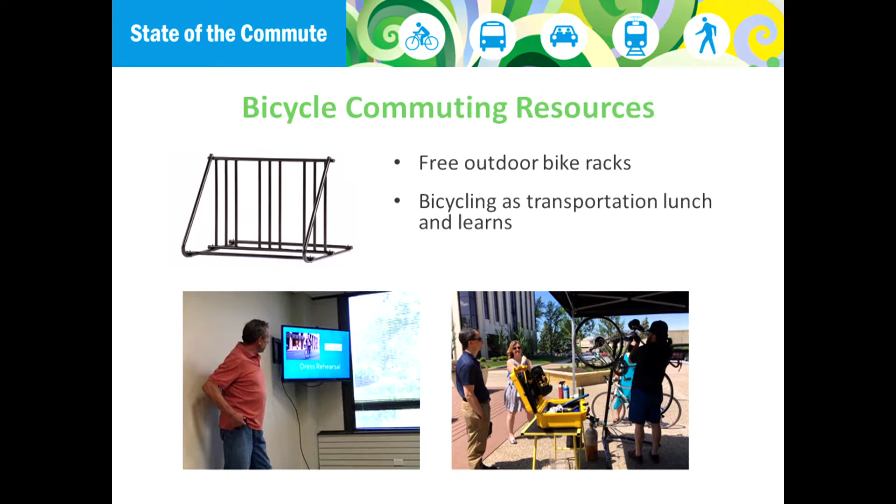We bring in an expert who talks about, really for the novice biker, someone who hasn't tried biking to work, what do you need to know, what kind of gear do you need, how to ride in traffic, doing a dress rehearsal, preparation. It's a really good comprehensive lunch and learn, and we facilitate that at your work site. We also facilitate bringing in various bike shops who will do little mobile safety checks. So they bring in their truck and they can do repairs on your employees' bikes. Just simple safety checks for brakes and drivetrain and tires and such. That's the on-site bike tune-up events.

And then we can provide assistance with your Bike to Work Day celebration. So whether it's during May for the National Bike to Work Month or during our June week, we can provide encouragement and resources to help you plan a great Bike to Work Day. There are 69 bicycle-friendly businesses in Minnesota. This is a League of American Bicyclists program, and we have an application deadline coming up very soon. We can help you get connected with the application and get you on the list for being the 70th bicycle-friendly business in Minnesota.

And then Melissa's going to come up and finish this piece. Thank you.

Hello again. Well, looking at the clock, we're running up on our time for staying on track to make sure that we give proper recognition to our employers and champions and commuters. So we're going to skip through the slides that we have here on what's in it for your company. Why should you participate and offer commuting programs, which is an important message, but we want to make sure that you are able to hear the rest of the program.